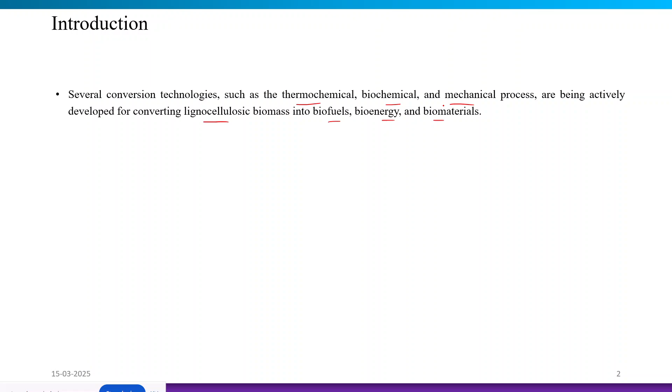So, in this lecture, we will mostly focus on pyrolysis. It is one of the important thermochemical technologies that produces bio oil as well as biochar, which can be further upgraded into a variety of value added products. We focus on pyrolysis because our lecture is about biochar and bio oil production, and we get simultaneous production of these two products from pyrolysis.

There are different kinds of pyrolysis processes according to the heating rate. Depending on the heating rate, the percentage yield of bio oil and biochar varies. We will mention other processes that also help us convert biomass into biochar or bio oil. Biomass pyrolysis has been recognized as a potential alternative technology to generate carbon negative or carbon neutral fuels, which will also help reduce the burden of fossil fuels on the environment.

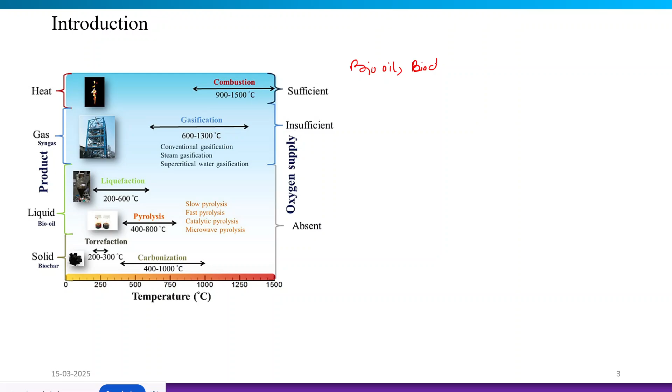So, in this picture, you can see the existing technologies, which give us heat along with various products, like bio oil, biochar, and also syngas, right? There is a temperature scale, and on the right hand vertical axis we can see the oxygen supply. It is also an important factor for the different process conditions.

Combustion is a thermal process operating around 900 to 1500 degrees Celsius in the presence of sufficient oxygen, right? When there is sufficient oxygen, we are mostly converting biomass energy directly to heat or thermal energy.

Gasification is a thermochemical process that operates with partial or insufficient oxygen. There are varieties like conventional gasification, steam gasification, and supercritical water gasification. The maximum product yield from gasification is syngas, with very limited production of biochar or bio oil.

So when we want to convert biomass into a gaseous product, we go for gasification. Depending on our desired product and the feedstock characteristics, we choose the process wisely. With liquefaction, we get mostly the liquid or bio oil product. Here you can see the variation in temperature of the process conditions.

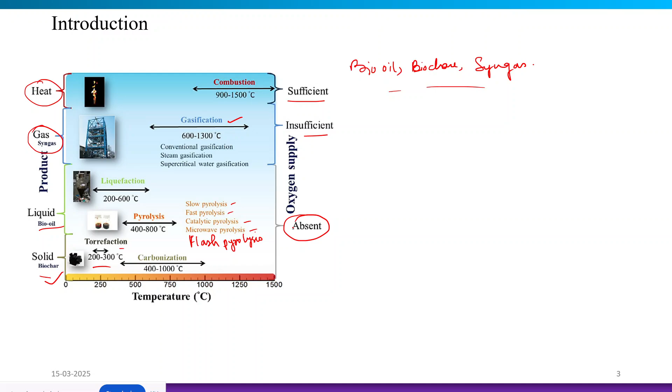So pyrolysis, torrefaction, and carbonization operate in the absence of oxygen. So you can see this biomass can be converted into different target products and other byproducts, which have been mentioned in this picture. We are talking about slow pyrolysis. The reaction ranges are quite flexible depending upon the process you are choosing. Like slow pyrolysis, it can be from 300 to 700 as well. Okay, so in slow pyrolysis, the target product is mainly biochar, but there are other byproducts also like bio oil and combustible gases.

Coming to fast pyrolysis, where there will be a faster heating rate, the reaction temperature is around 350 to 700, obviously in the absence of air in both of the cases. But in fast pyrolysis, we will get the target product of bio oil, and there will be byproducts, that is biochar and combustible gases. So you can easily recognize that when there is a faster heating rate, there will be more formation of the liquid product, or the bio oil.

Coming to gasification, the process condition is maintained in the insufficient or partial presence of air or oxygen. The reaction temperature is quite high, higher than pyrolysis, like 700 to 1200 degrees Celsius. And the target product is syngas. Here we mostly get these combustible gases, syngas, and byproducts like biochar and tar.

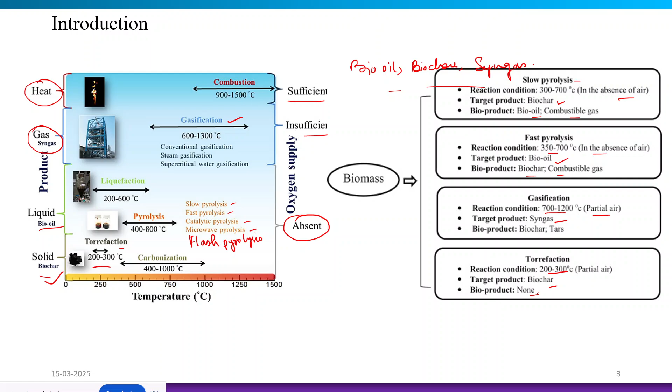So we were talking about biochar production. We already discussed the major processes we follow for biochar production, right? So biochar is produced by thermochemical conversion processes. We discussed a little bit about pyrolysis and torrefaction, and we will also discuss the hydrothermal carbonization process. So this carbonization process can be in the absence or in the presence of the hydrothermal condition. In these cases, we will get biochar and hydrochar respectively.

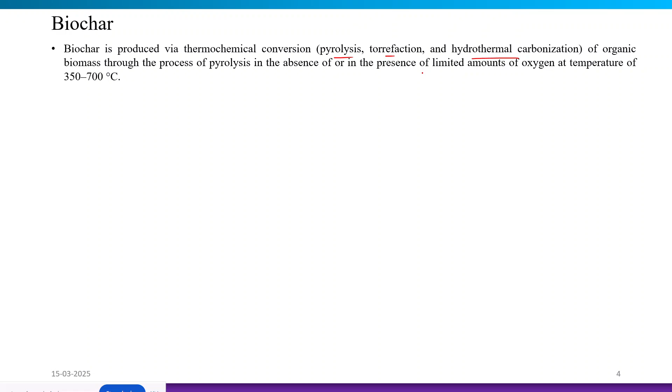So we convert the biomass through the process of pyrolysis in the absence of air in the range of 350 to 700 degrees Celsius. So we produce biochar as a carbon rich solid residue with carbon content ranging from 65 to 90 percent. And this biochar has surfaces with a high level of aromatic species, as well as oxygen functional groups on the surface of the biochar, and it also has a good porous structure.

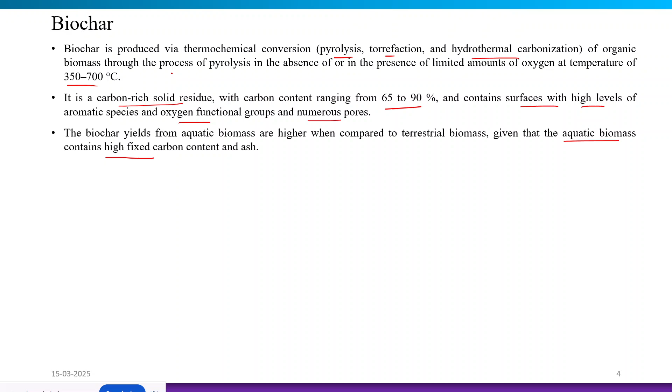Biochar yield from aquatic biomass, like algae or other kinds of aquatic biomass, is higher when compared to the yield we get from terrestrial biomasses, given that aquatic biomass contains higher fixed carbon content and also higher ash content. So as a result, we get the maximum biochar yield when we use aquatic biomass as our feedstock.

The elemental composition of the biochar changes with pyrolytic process parameters like pyrolytic temperature, and it also depends on the type of feedstock you are using. The carbon content tends to increase when we increase the pyrolysis temperature. While the carbon content increases, we get a decrease in other contents like nitrogen, sulfur, hydrogen and oxygen. These elements evolve as gaseous products when we increase the pyrolysis temperature.

Feedstock carbon is modified during this heating process to produce more aromatic rings in the biochar structure. These aromatic rings present in the biochar cannot be easily degraded by microorganisms. Thus, we make long-term carbon sequestration possible in the soil. Biochar produced from different biomass feedstocks will help with long-term carbon sequestration.

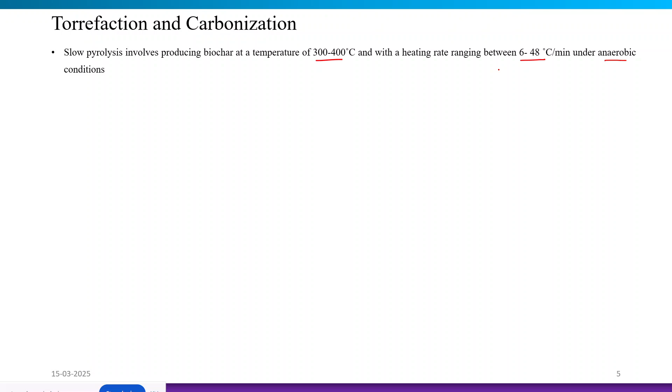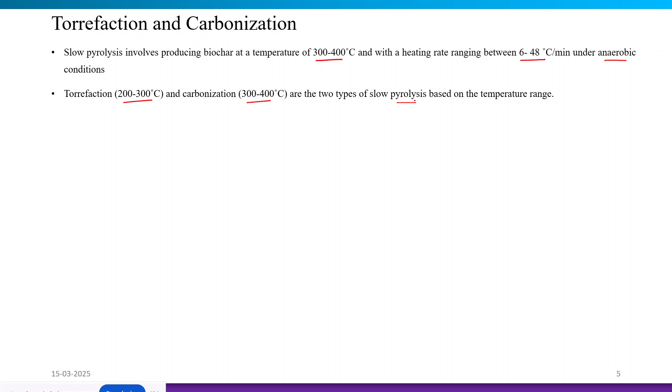We will now discuss slow pyrolysis processes, mainly torrefaction and carbonization, because they have a higher yield of biochar. Slow pyrolysis involves producing biochar in the range of 300 to approximately 400 degrees Celsius, with a heating rate of 6 to 48 degrees Celsius per minute under anaerobic conditions, in the absence of oxygen. Torrefaction's temperature range is 200 to 300 and carbonization is slightly higher, 300 to 400 degrees Celsius. These are categorized as slow pyrolysis processes depending on the temperature range.

Torrefaction and carbonization are thermal decomposition processes which produce a carbon-rich product like char with high energy density, brittle in nature, with higher hydrophobicity and reduced H/C and O/C ratios. These reduced ratios are required for a good biochar. In these processes, organic substances are heated in an inert atmosphere, usually at atmospheric pressure, which generates both condensable and non-condensable gases along with the char.

The solid product, or char, generally contains a carbon-concentrated residue and the mineral components of the raw material, while the gaseous product is composed of water, carbon dioxide, carbon monoxide and several organic compounds which form and are released during the process. So ultimately, we get a solid carbon residue as char.

The structural composition of the biomass determines the temperature region of torrefaction. It has been noticed that biomass with a high hemicellulose content is preferably subjected to light torrefaction, around 200 to 235 degrees Celsius. Strong torrefaction, in the range of 235 to 275, is mostly beneficial for biomass with higher cellulose and lignin content.

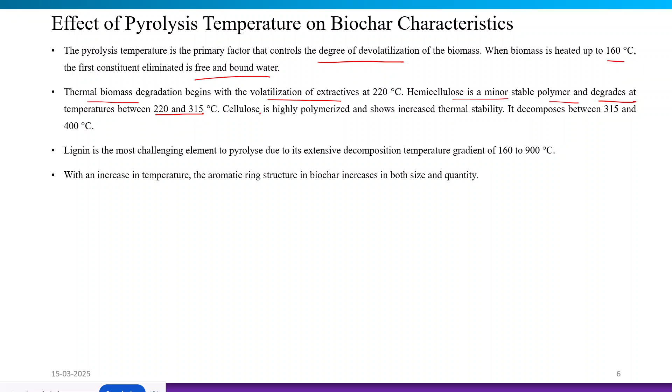Then when we slightly increase the pyrolysis temperature, there will be initiation of thermal biomass degradation with volatilization of extractives. Then hemicellulose gets degraded in the temperature range of 220 to 315 degrees Celsius. Then comes cellulose. Cellulose is highly polymerized and shows higher stability, so it gets decomposed in the range of 315 to 400 degrees Celsius.

And at the last is lignin, the most challenging element in the lignocellulosic biomass. It gets pyrolyzed due to an extensive decomposition temperature gradient in the overall range of 160 to 900 degrees Celsius. So we can see with the increase in temperature, the aromatic structure in the biochar increases in both size and quantity.

With the increase in pyrolysis temperature, the availability of the major structural components and other macromolecules of the biomass in the solid residue decreases. It also decreases the polarity of the biochar, so as we increase pyrolysis temperature, the biochar gets more hydrophobic in nature. The hydrophobicity increases with temperature to a certain extent, but if we increase the temperature beyond, suppose, 900 degrees Celsius, then the hydrophobicity will decrease again.

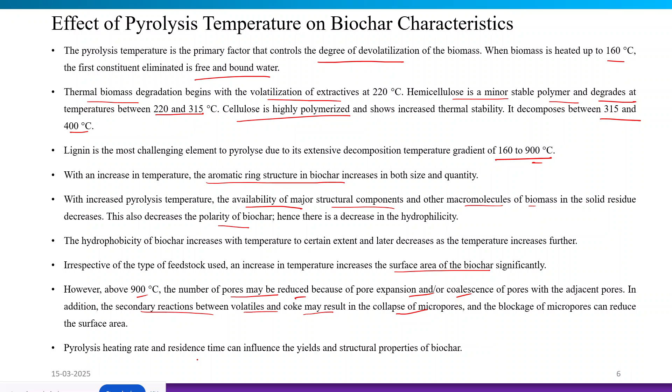Is there any question? Sorry, my net got disconnected for some time. Yeah. Is there any question till now?

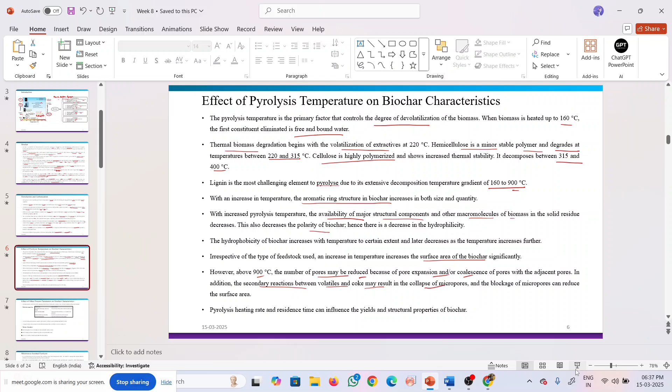Okay, so we were discussing the biochar characteristics which will be affected by the variation of the process parameters. We have discussed how the pyrolysis temperature variation will affect the biochar quality. So there will be effects of other process parameters on the biochar characteristics.

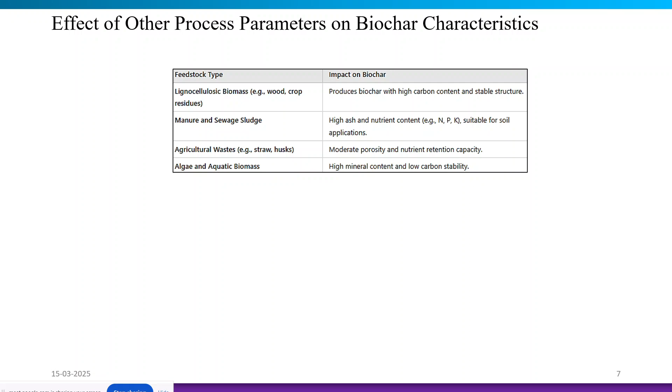So, biochar properties can be tailored by adjusting feedstock type, heating rate, residence time, activation methods, and gas environment. When we talk about feedstock composition, lignocellulosic biomass produces biochar with very high carbon content and a comparatively stable structure. When we take manure or sewage sludge kind of feedstock, we get high ash content and nutrient content, which is suitable for soil applications.

Agricultural waste like straw or husk produces moderate porosity and nutrients in good quantity in the produced biochar. Now, algae and aquatic biomass produce mineral content in the biochar but low carbon stability. So the most stable and highest carbon content biochar we can produce using lignocellulosic biomass.

So we already discussed that a slower heating rate will promote complete carbonization, which will lead to a more structured and stable nature of the biochar. A longer residence time will increase the biochar stability, but it may reduce the yield of the biochar due to excessive carbon loss.

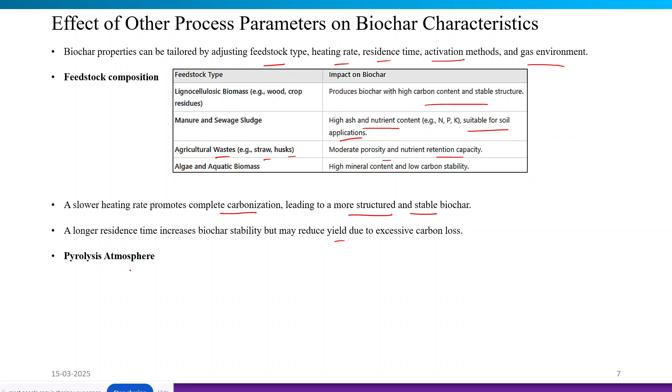This pyrolysis atmosphere also has an important role in the biochar characteristics. Now, when we use an inert atmospheric condition, the biochar produced will have stable carbon content. When we do it in the presence of steam or in a carbon dioxide atmosphere, it will enhance the biochar porosity and, as a result, it will also enhance the surface area of the biochar.

Oxygen and air, if present in the pyrolysis condition, which we generally don't consider, but if oxygen is still present, it leads to oxidation and reduces the biochar stability. So that's why when we do the pyrolysis reaction, we must ensure that there is no contact with oxygen during this thermal conversion.

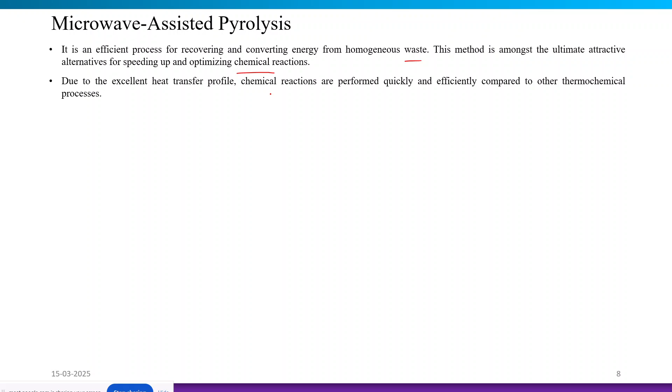So this method is amongst the ultimate attractive alternatives for speeding up and optimizing the chemical reactions. Due to the excellent heat transfer profile that we follow in microwave assisted pyrolysis, the chemical reactions are performed quickly and efficiently compared to the other thermochemical processes.

So microwave assisted pyrolysis provides several benefits compared to traditional pyrolysis, including uniform heating altogether. If your feedstock is homogeneous, there will be more chances of uniform heating, and a quick heating rate, volumetric and selective heating are provided in microwave assisted pyrolysis.

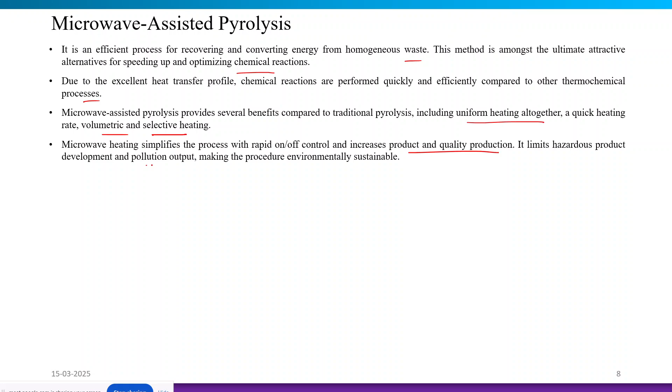So this microwave heating simplifies the process with rapid on-off control and increases product and quality production. It limits hazardous product development and pollution output. Also, it makes the procedure environmentally sustainable. An additional benefit of microwave assisted pyrolysis is rapid heating efficiency due to the in situ heating method that we follow in microwave assisted pyrolysis.

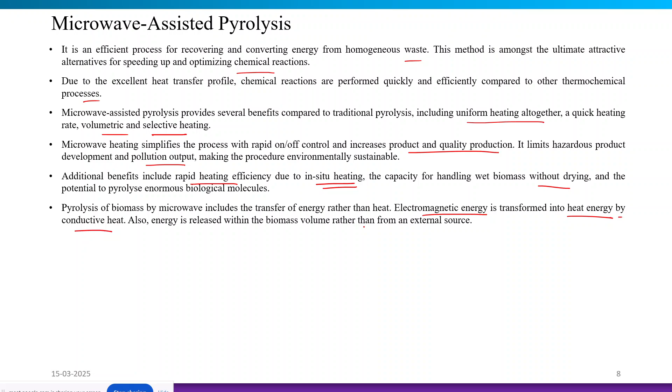So we can handle wet biomass without drying, and we also have the potential to pyrolyze enormous biological molecules without any issue in the microwave assisted pyrolysis process. What we do here is transfer energy rather than heating the biomass. They transfer electromagnetic energy, which is transformed into heat energy by conductive heat transfer. Also, the energy is released within the biomass volume in microwave assisted pyrolysis, rather than supplied from an external source.

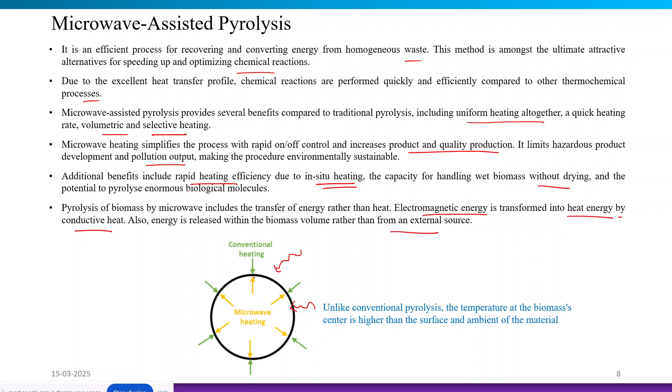So in this picture you can get an idea of how microwave heating is different from the conventional heating process. In the conventional heating process, suppose this is a biomass molecule, we are heating at the surface of the biomass molecule. But in the case of microwave heating, we are passing electromagnetic energy which will transfer the energy into the volume of the biomass. So the temperature of the biomass center gets higher than the temperature of the surface. Thus it goes from inner to outward.

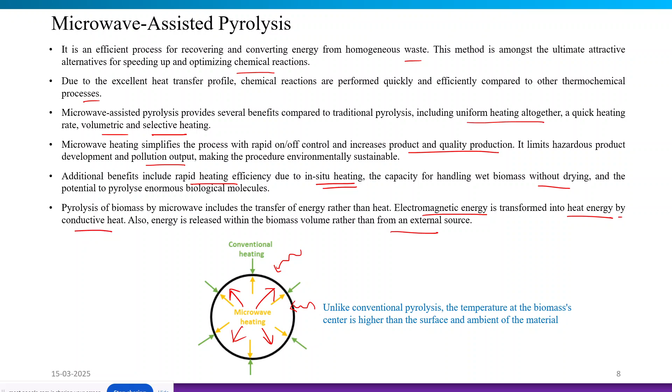This way it is different from conventional heating, and as we are doing it in a volumetric way, uniform heating is expected in the microwave heating process. The condition is that the feedstock should be homogeneous in nature so that it assists the uniform heating.

So microwave biochar has unique physical and chemical properties, and it is very stable compared to the conventional pyrolysis method. Compared to the previous heating process, the feed in this process is heated from the depth of the sample to the surface of the sample. That is, from the inner part of the sample it slowly goes to the surface. Thus, it allows the heating process to occur at a very rapid rate.

Microwave heating is a very quick and energy efficient heating process. It facilitates yield production and eliminates the need for liquid convection. It also facilitates good thermal control and restores the energy and chemical value of the waste products. So it has the best biochar production in terms of quality, and it is also an efficient method in terms of surface efficiency and cost effectiveness.

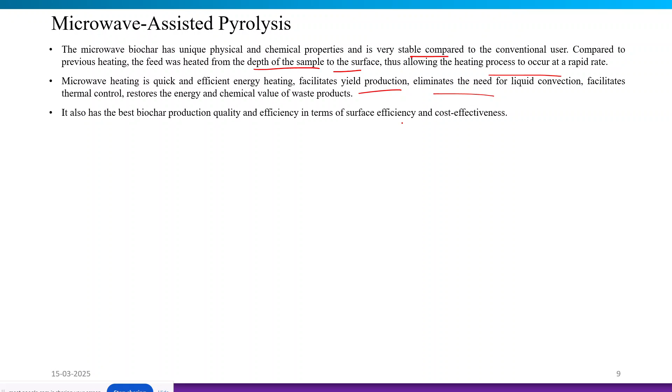So here the resulting biochar will have a higher surface area, approximately 450 to 800 square meters per gram, and it also contains many functional groups on the surface of the biochar when compared with conventionally produced biochar.

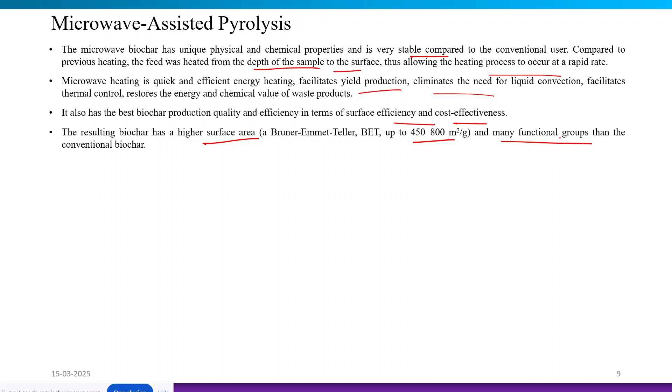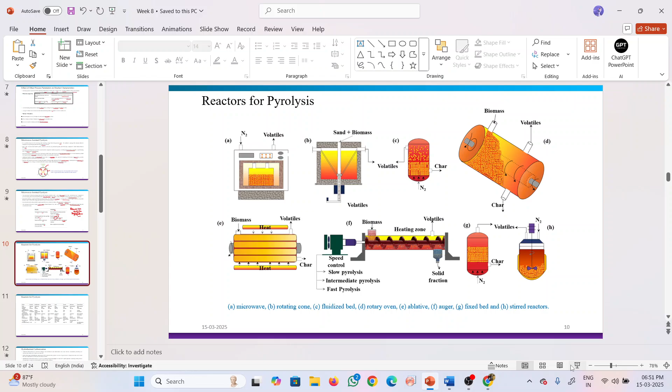So here you can see some visual schematics. You can get an idea of how the pyrolysis reactor acts or behaves. The first one is microwave pyrolysis. You have seen microwaves, right? Microwaves we use for cooking. On the same principle, the same kind of reactor we use for microwave pyrolysis reactions. So you can see the inert nitrogen gas is passed through and the volatiles are collected from the other outlet, and the microwave energy passes through the biomass placed inside the reactor, which helps to get a faster heating rate and converts the biomass to carbonaceous material or other volatiles.

The second one is the rotating cone. Here we use sand plus biomass in the reactor, and we collect the volatiles at the top of the reactor, and this is a rotating cone design. Next, the fluidized bed, which is widely used for pyrolysis reactions. Nitrogen is passed through from the bottom of the reactor. The biomass molecules are fluidized, and under the temperature conditions they are converted into char product as well as volatiles, which are collected from the top of the fluidized bed reactor.

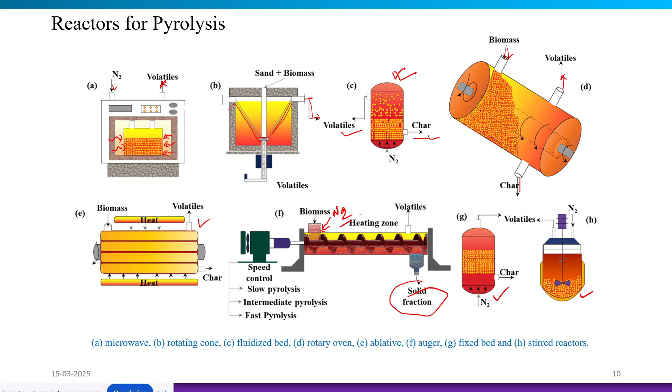This last one is the fixed bed. It is also widely used, and the stirred tank reactor. All of these reactors that we discussed, we generally use for the pyrolysis purpose.

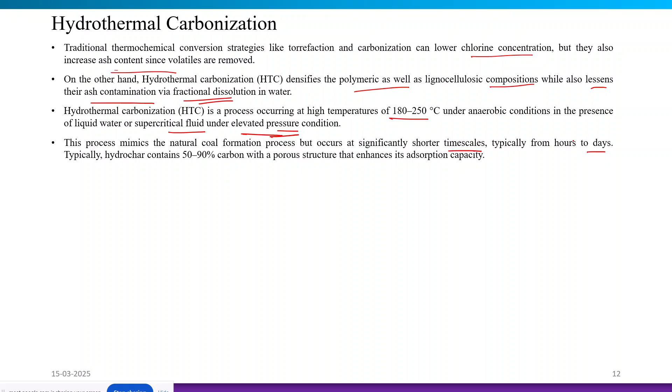So here, to differentiate, we term the char produced here as hydrochar. This hydrochar contains 50 to 90% of carbon with a good porous structure that will enhance the adsorption capacity of the hydrochar. So this process is characterized by a deep degree of impact on the feedstock, resulting in a higher quantity of the carbon product as well as higher quality. So this is known as, we can also refer to it as, biocoal or hydrochar.

So longer hydrothermal treatments contribute not only an increase in the calorific value of the hydrochar, but also produce material with a more complex structure associated with the polymerization of the intermediates that are formed. They get polymerized and ultimately form a good quality of hydrochar. But sometimes when we get a good quality of hydrochar, the yield of the hydrochar gets reduced.

An increase in the reaction time contributes to the formation of certain porosity of the structure. So we get an increase in the pore volume and a higher surface area when we increase the reaction time. So during the hydrothermal carbonization process, biomass undergoes a series of complex chemical reactions including dehydration, decarboxylation, polymerization. Hydrochar is rich in oxygen-containing functional groups, thus it promotes the higher reactivity of the hydrochar.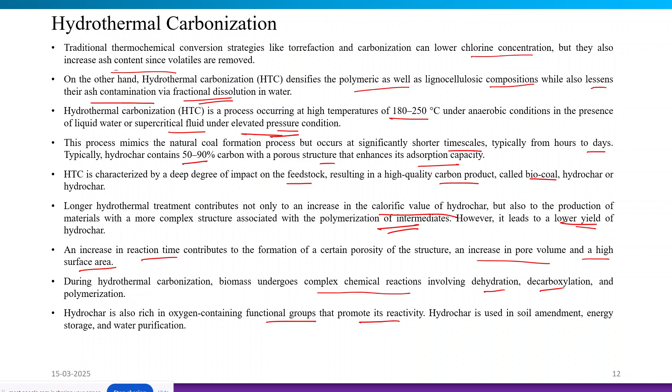Hydrochar can also be used like biochar in the soil treatment process, energy storage like manufacturing of electrodes, and the water purification process as a good adsorbent. The advantage of hydrothermal carbonization is that without any energy-intensive drying method, we can transform any kind of biomass with any quantity of initial moisture content. We can form the carbonaceous solid by this method, hydrothermal carbonization.

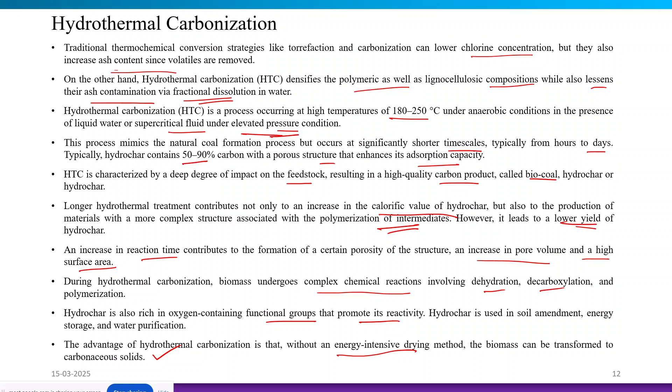So we are not following any kind of restrictions for the initial moisture content of the biomass, because we are not requiring any kind of dried biomass. We can directly go with the wet biomass and we can produce the carbonaceous material in the presence of elevated pressure and temperature conditions. So these are the four steps that we follow in the hydrothermal carbonization process. We can operate with biomass with 75 to 90% initial moisture content. We can easily process this biomass in this hydrothermal carbonization process.

So first we go for hydrolysis, where biomass components such as cellulose, hemicellulose, and lignin are hydrolyzed into smaller molecules in the presence of high pressure water, leading to the formation of some sugars, organic acids and other soluble compounds. The next step is dehydration, where water molecules are removed from the biomass matrix, resulting in the formation of intermediates such as furfurals, aldehydes and ketones.

Next, it follows the decarboxylation process and polymerization, where the carboxylic groups present in the biomass components are eliminated and they lead to the release of carbon dioxide, and they also form aromatic compounds in this stage. The last stage is carbonization, where continuous heating and high pressure conditions cause the carbonaceous intermediates to undergo the carbonization process, which results in the production of the solid hydrochar.

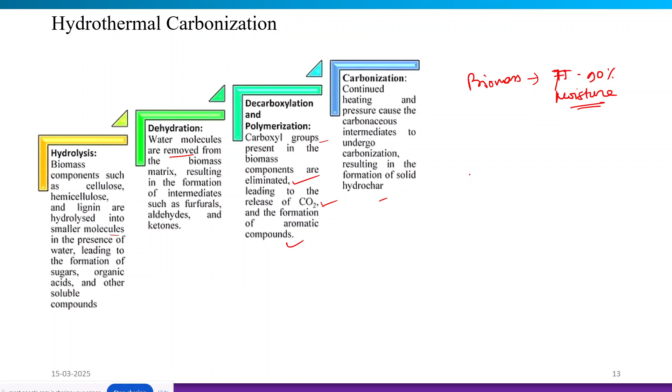So in this process, regarding the high pressure condition, this autogenous pressure is automatically generated in the system. Residence time is 0.5 to 8 hours. In a very short time we get the carbonaceous material. So the carbon content is increased during this last stage of the carbonization phase. The content of oxygen and mineral matter decreases, with a minor gaseous product. So these are the four major stages followed in hydrothermal carbonization.

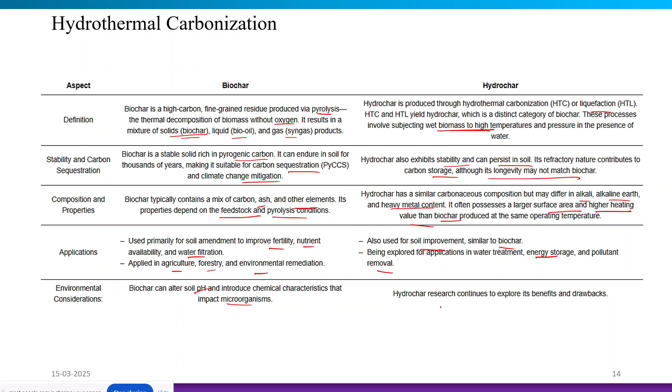Next, we are going to discuss the gasification process, because in gasification we get char as a byproduct, not as a main product. But still we are going to discuss it because this process has a byproduct yield of biochar. Gasification converts carbonaceous material with a gasification agent, like air gasification or steam gasification, or in the presence of oxygen at high temperature and pressure, into biochar and oxygen deficient states.

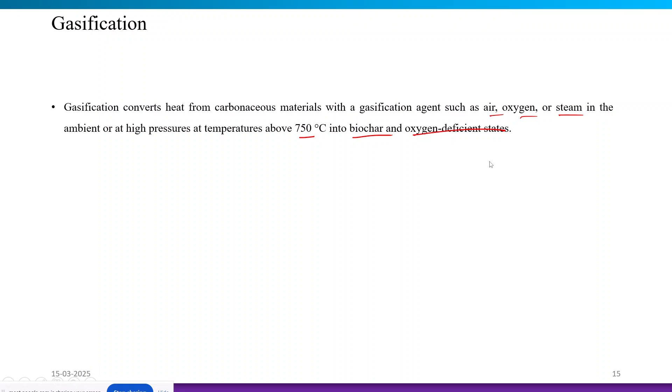Gasification takes place at a high temperature, so we get more cracking of the carbonaceous material and more gaseous yield. When air is used as an oxidizing medium, the resulting gas contains 85% syngas, which includes hydrogen, carbon monoxide, carbon dioxide, some methane, and other lower molecular weight hydrocarbons. Steam gasification yields more hydrogen, which has a higher heating value.

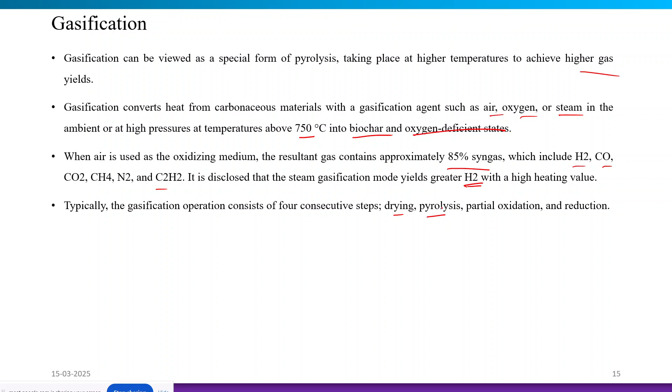Typically, gasification consists of four consecutive steps: drying, pyrolysis, partial oxidation, and then reduction at a higher temperature region. Biochar yields are insufficient under gasification conditions because we get gaseous products at maximum yield. That is the primary limitation of this process: biochar is produced as a byproduct, not the main product. And there are a lot of chances of greenhouse gas emission.

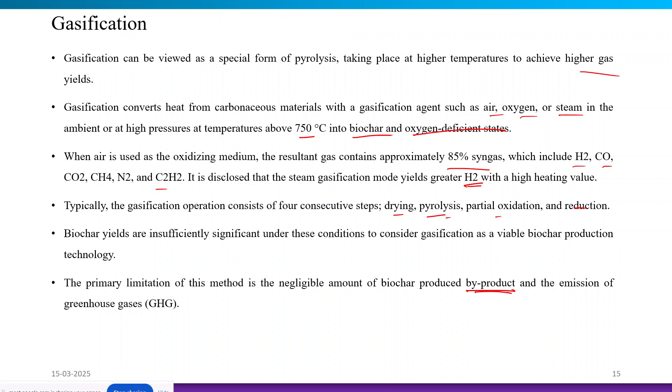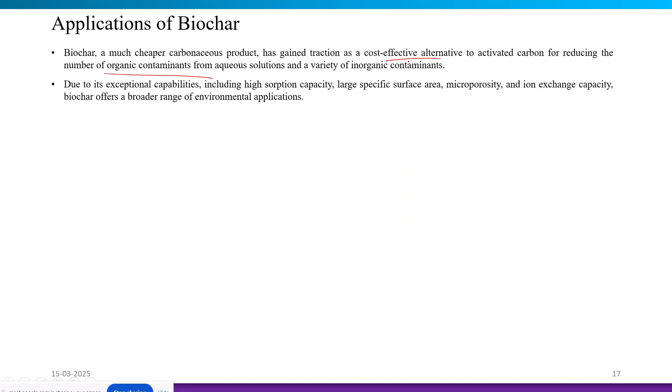So we will now discuss the applications of biochar in different environmental conditions. We are producing biochar from biomass, so it is obviously a cheaper carbonaceous product. It has gained a lot of interest as a cost-effective alternative to activated carbon for reducing a number of organic contaminants from aqueous solutions and a variety of inorganic contaminants. Due to exceptional capabilities like high adsorption capacity, large specific surface area, microporosity, and ion exchange capacity, biochar offers a wide range of environmental applications.

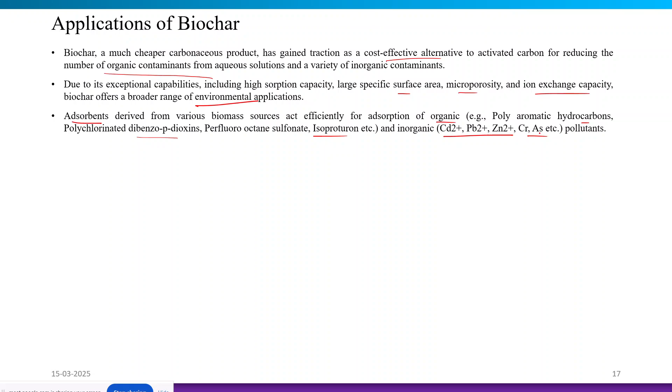Coming to biochar as an adsorbent, it efficiently acts for adsorption of organics like polyaromatic hydrocarbons, polychlorinated dibenzo-p-dioxins, or isoproturon. So these kinds of organic chemicals it can adsorb or separate, and also inorganic metal ions it can adsorb, reducing the pollutants in the environment.

Biochar, which is a porous solid with a large surface area, is also a good material for wastewater treatment. It has shown to be an excellent medium for absorbing nutrients from the effluent, and it can also be used as a soil modification source. While the large surface area of activated carbon favors toxin absorption via pore filling, many components, particularly surface functional groups, facilitate biochar's removal performance.

Biochar's distinctive chemical structure, such as higher surface area and a specific quantity of surface functional groups, is simply generated via activation and functionalization, which is a very prominent, promising application as a flexible catalyst and catalytic support in various chemical reactions. By oxidation, biochar may be simply separated from the catalyst to extract the precious metals that are adsorbed. Thus, utilizing biochar as a catalyst will increase its use and cyclic capacity.

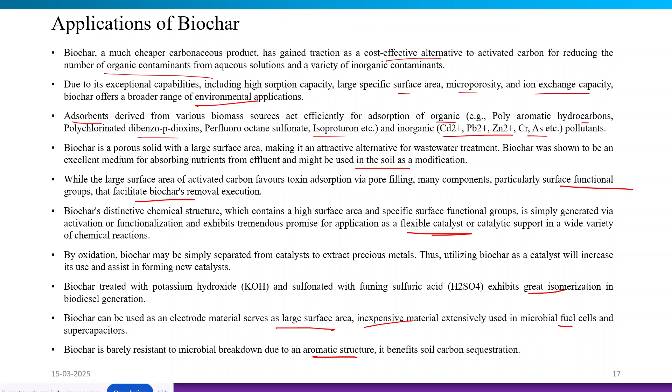Application-wise, as a catalyst it is low cost and a more significant proportion of functional groups are present. For energy storage, it produces electrode material with relatively poorer performance than other electrodes we use, but still we can use it as an alternative. As a soil amendment, it increases fertility and improves the quality of the soil, and increases carbon sequestration. The benefits are that it is a low cost material and reduces greenhouse emissions. Also, it regulates nutrient loss. But if heavy metals and polyaromatic hydrocarbons are present inside the biochar, it may contaminate the soil.

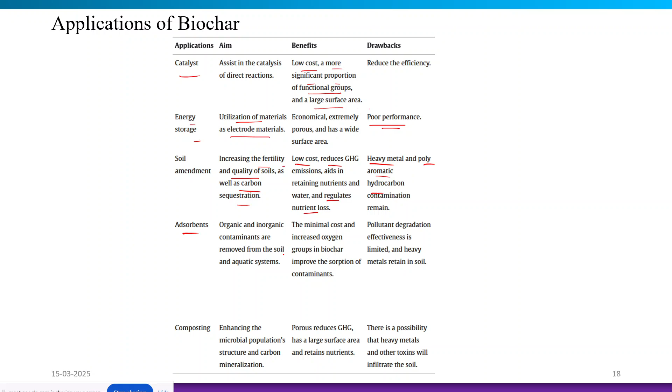In terms of the adsorbent, organic and inorganic contaminants can be removed very efficiently by different kinds of biochar adsorbents from soil as well as aquatic systems. It offers lower cost, and increased oxygen groups in the biochar improve the adsorption capacity for different contaminants. But sometimes pollutant degradation effectiveness is limited, and heavy metals may be retained in the soil for a longer time, which may create contamination. Also, if we compost the biochar, that will enhance the microbial population structure, which will ultimately enhance carbon mineralization. Thus it reduces greenhouse gas emissions and also increases the nutrient value of the soil.

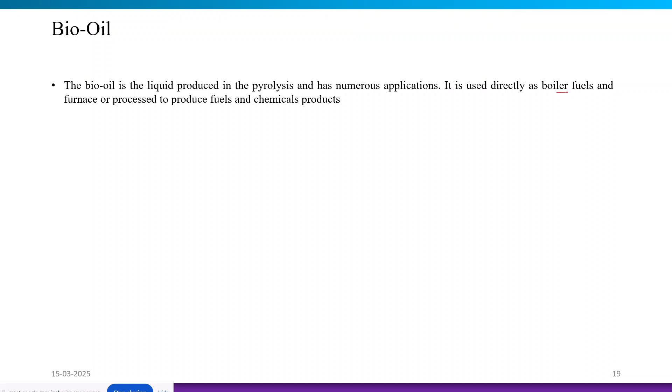We discussed the characteristics of bio oil in detail in the last class. So we will now mostly touch on the applications and advanced processes of bio oil production, not in detail. Bio oil, which is the liquid produced in the process of pyrolysis, also has numerous applications. It can be directly used as boiler fuel, but it has certain limitations we need to take care of. It can also be used as a raw material to produce different chemical products.

Bio oil production mainly follows the fast pyrolysis process, which favors bio oil yield as a primary product under moderate temperature conditions, shorter vapor residence time, and higher heating rate. Bio oil is composed of a complex mixture of organic substances like aromatic hydrocarbons, phenols, ketones, esters, ethers, sugars, amines, alcohols, furans, and water, obtained by chemical reactions and biomass moisture.

This bio oil is highly oxygenated in nature, and the higher oxygen content sometimes creates a lot of issues for utilizing bio oil directly in boiler conditions. Because it is highly oxygenated, it is also chemically unstable. So we need to go for upgrading of the bio oil so that we can reduce the oxygen content and remove other wastes.

Bio oil has some undesirable features like high acidity, low thermal stability, low heating value, and high viscosity when compared to conventional diesel. So we need to go for some upgradation method to improve these shortcomings in bio oil.

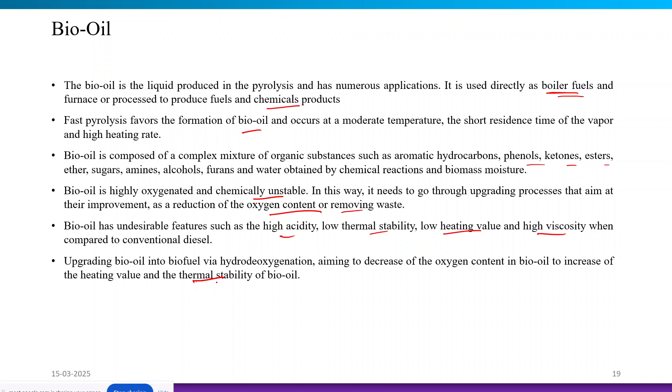We upgrade the bio oil into biofuels via hydrodeoxygenation, which aims to decrease the oxygen content of the bio oil to increase the heating value as well as to improve the thermal stability of the bio oil. We will now discuss some of the important operating parameters that affect the biomass pyrolysis process with the target of bio oil yield.

First one is temperature. Each biomass has potential to provide maximum bio oil yield at a specific pyrolysis temperature. The conversion efficiency will increase with the increase in temperature due to the extra energy available to break down the biomass molecular bonding, and there are studies that reported higher liquid yield in the range of 450 to 550 degrees Celsius.

But at a higher temperature there is secondary cracking of the volatiles, which results in a higher gas yield. So if secondary cracking is happening, we will have more gaseous yield and we will not get a higher yield of bio oil. So we need to minimize the secondary reactions.

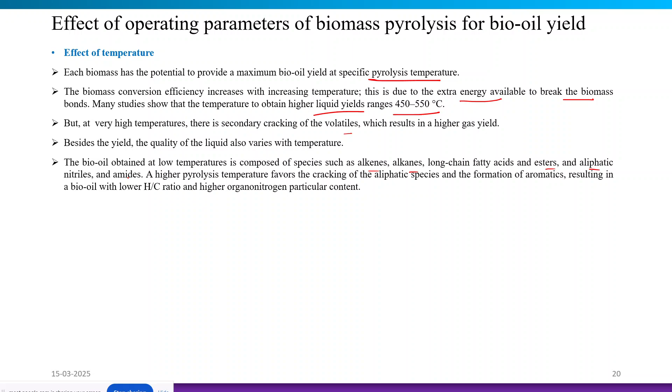Beside the yield, the quality of the liquid also varies with the temperature. Bio-oil obtained at a low temperature is composed of alkenes, long fatty acids, esters and aliphatic nitriles or amides. A higher pyrolysis temperature will favor the cracking of these aliphatic species and they form more aromatics, resulting in a lower H/C ratio of the bio-oil and higher organonitrogen content.

Now, the effect of the heating rate. The heating rate of the pyrolysis process is another crucial factor for biomass decomposition. We already discussed that in fast pyrolysis, the higher heating rate causes maximum bio oil yield. The pyrolytic behavior resulting from heating rate variation can also be associated with the feedstock composition. In case of triglyceride material, a higher heating rate can induce cracking of the condensable vapors.

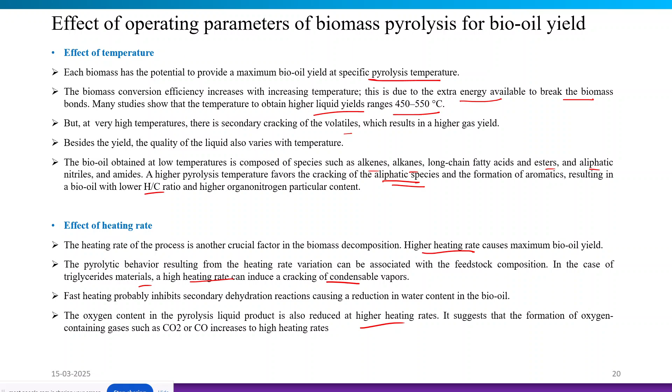Faster heating probably inhibits the secondary dehydration reaction, causing a reduction of the water content in the bio oil. That's why fast pyrolysis is mostly preferable for the production of bio oil. The oxygen content in the pyrolysis liquid product is also possibly reduced with a higher heating rate. It is suggested that the formation of oxygen containing gases such as carbon dioxide and carbon monoxide also increases due to the higher heating rates.

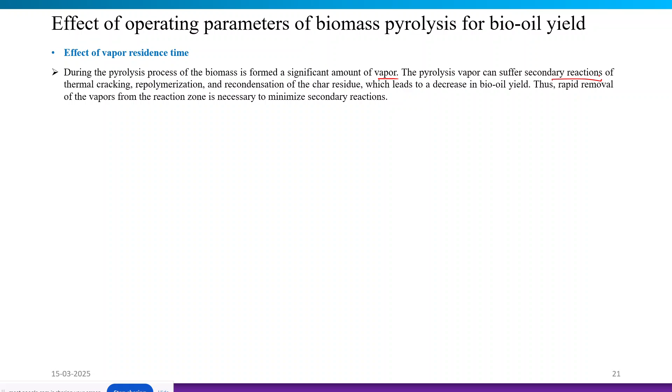Next one is the effect of the vapor residence time. During the pyrolysis process of the biomass, a significant amount of vapor is formed. This pyrolysis vapor can suffer secondary reactions through thermal cracking, repolymerization or recondensation of the charred residue, which leads to a decrease in bio-oil yield. So we need to minimize the secondary reactions through rapid removal of the vapor from the reaction zone.

Several studies analyzed that increasing the flow of the inert nitrogen gas inside the reactor causes an improvement in the bio-oil yield. However, if we increase the flow rate of the inert gas too much, the liquid yield will reduce, because the condensation of the vapor will not be completed, which ultimately increases the gaseous yield in the process. Higher temperature and a longer residence time are suitable for oxygen free bio oil production.

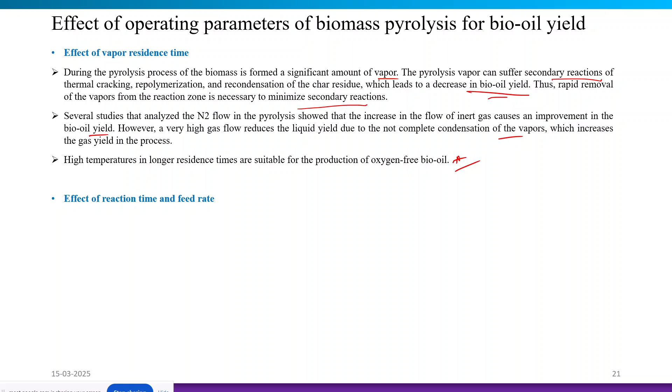Now coming to the effect of the reaction time and feed rate of the biomass. A longer reaction time can cause secondary reactions of the pyrolysis vapor, which can cause lower bio oil production. So we need to optimize the reaction time. With the feed rate, the product distribution and the bio oil characteristics are entirely dependent on the reactor configuration. Under a higher feeding rate, the vapor residence time will be shorter, meaning that secondary cracking or secondary reactions will not be favorable.

So we will get a more quantity of the bio oil and less quantity of the char or gaseous product. But very high feeding rate of the biomass also may cause decrease in the bio oil production, because we are not allowing the required residence time for the overall conversion. So bio oil yield will be reduced. So we need to go for optimization of the process to overall increase the bio oil yield.

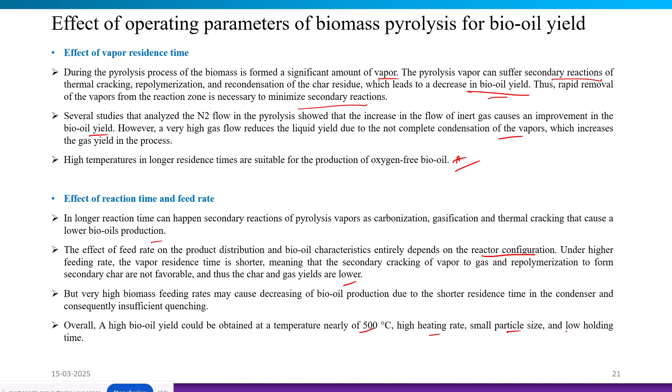So we can say that through the research we have found out that a high bio oil yield could be obtained in the temperature range of 500 with a higher heating rate, a smaller particle size, and low holding time.

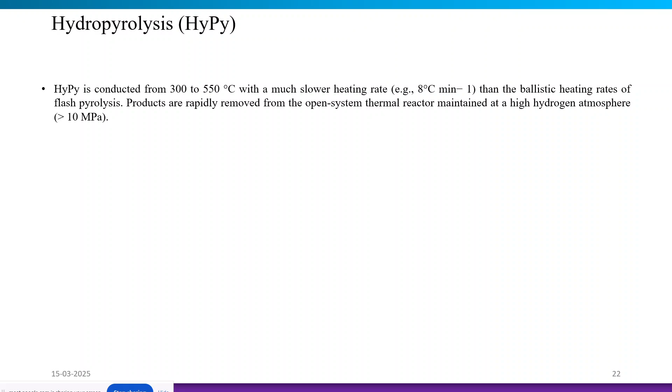So next, we are going to discuss about the hydropyrolysis process. This process is also an advanced process for the production of the bio oil. Specifically, this hydropyrolysis is conducted in the range of 300 to 550 degrees Celsius with a slower heating rate than the ballistic heating rates of flash pyrolysis. the products are rapidly removed from the system when a high hydrogen atmosphere is maintained inside the reactor.

So catalysts are very important for this hydropyrolysis. Different catalysts like zeolite and different other catalysts are used in the process for breaking down the complex organic molecules, while it minimizes the char formation and maximizes the bio-oil yield. So, one shortcoming of the conventional pyrolysis is that bio-oil produced is rich in oxygen content that we were discussing in last slides. But in case of the hydropyrolysis, it produces the bio-oil with reduced oxygen.

It can also increase the volatile yield and the proportion of the lower molar mass hydrocarbons in the pyrolysis product. So its higher volatile yield is attributed to the hydrogenation of the free radical fragments sufficient to stabilize them before they repolymerize and form the char. So the bio oil produced by the hydropyrolysis process has greater characteristics, like lower acidity, lower viscosity, higher hydrogen by carbon ratio, making it more stable and easier to refine into transportation fuel.

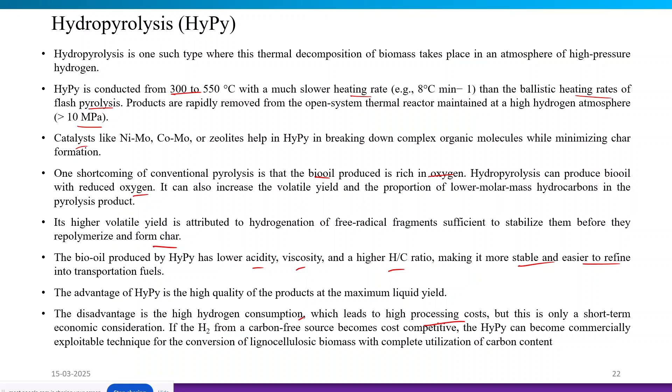The advantage of the hydropyrolysis is that it is producing high quality product at a maximum liquid yield. But it is having also some disadvantage, like high hydrogen consumption is occurring in the process. So the high processing cost is involved, and this is only a short term economic consideration. If the hydrogen from the carbon free source becomes cost competitive, the hydropyrolysis can become commercially exploitable technology for the conversion of the lignocellulosic biomass with complete utilization of its carbon content.

Now at the last we are going to discuss about the applications of the bio oil. So bio oil, we know that it has several types of applications. It can also be used as boiler fuel in comparison to the heavy fossil fuel. The combination of the bio oil features with the low emissions of the carbon dioxide, SOx, NOx. So they will reduce the air pollution, mitigate the problem that is related to the SOx, NOx emission from the boiler.

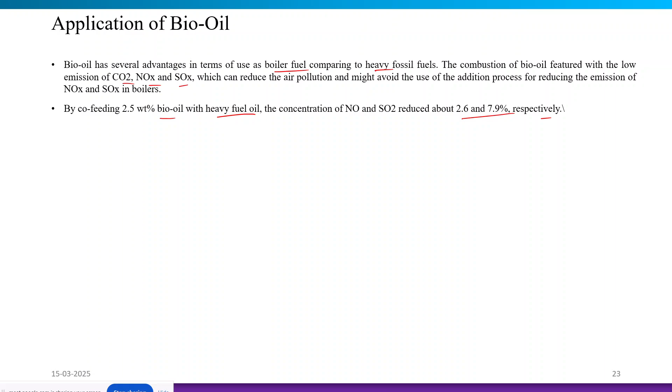So there has been a study that confirmed that co-feeding 2.5 wt% of the bio oil with the fossil heavy fuel, the concentration of the SOx and NOx may be reduced by this percentage respectively. So there is certain percentage of the co-feeding of the bio oil with the already existing heavy fuel oil. So we can have reduced emission of the SOx, NOx.

Direct burning of the bio oil, aiming for the heat production, could be competitive with the fossil fuel resources supply economically. While using the bio oil as a boiler fuel, proper pumping of the bio oil, ratio of the air flow rate to the bio oil flow rate, nozzle design, they could change the efficiency of the boiler significantly. However, due to distinct properties of the bio oil that we discussed, like higher acidity and higher oxygen content, and those kind of shortcomings, the configurations of the burner should be redesigned when we use the bio oil as a fuel.

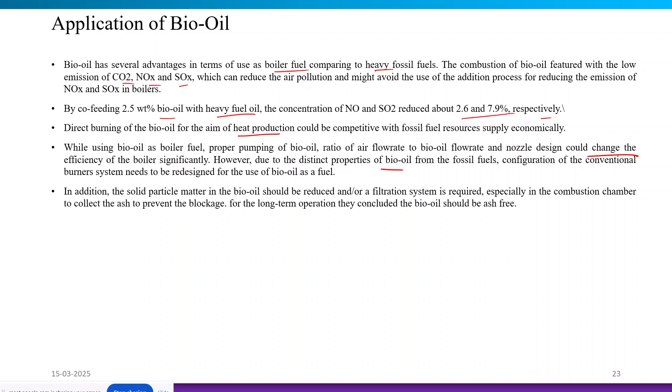In addition to that, the solid particle matter present in the bio oil should be reduced or should be treated through the filtration process, especially in the combustion chamber, to collect the ash to prevent the blockage. For longer term operation, researchers have concluded that the bio oil should be ash free. In addition to that, compared to the direct combustion of the bio oil, we can also go for the co-firing. Co-firing with fossil fuels could enhance the efficiency of the engine, and reduce the cost of the burner system and engine body modification.

With low co-feeding amount, like less than 5%, the bio oil could be co-fired with different fossil fuels without noticeable harm to the existing furnaces. The bio-oil contains high amount of the acid, water, and heavy oligomer compounds which make it unstable, and it contains lower energy content. As a result, the storage, transport, and direct use of the bio-oil in the engine of the vehicle is very difficult.

We overcome this by the help of the hydrodeoxygenation process, which can be employed as a methodology to improve the properties of the bio oil as engine fuel. This is a catalytic process, generally conducted under high pressure and high reaction temperature conditions, to reduce the oxygen content in the bio oil.

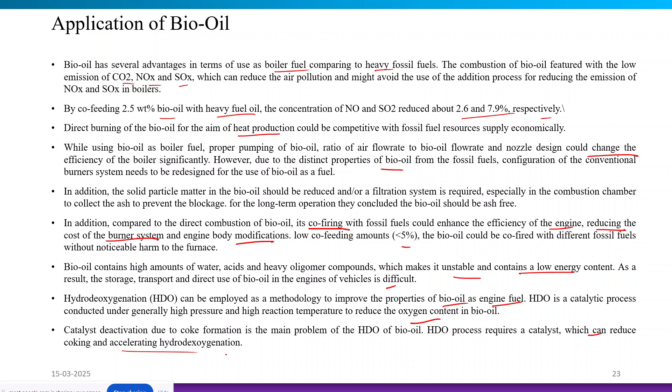Now, catalytic deactivation is also a great issue when we are using the bio oil as it is, because of coke formation, which is a main problem of the hydrodeoxygenation process of the bio oil. So this process requires a good catalyst which can reduce the coking and also accelerate the hydrodeoxygenation process.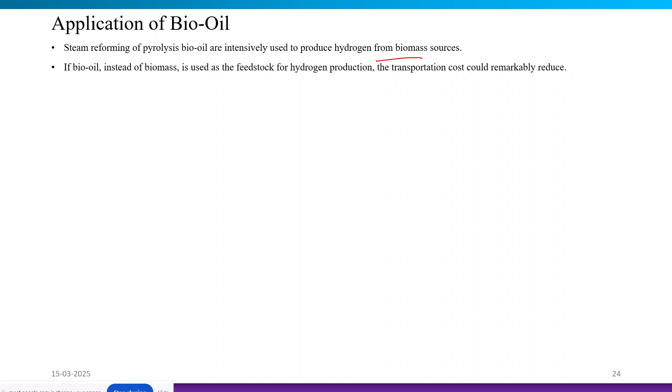Steam reforming of the pyrolysis bio-oil is intensively used to produce hydrogen from biomass resources. If the bio-oil instead of the biomass is used as a feedstock for hydrogen production directly, the transportation cost could be remarkably reduced. Raw biomass has a lot of volume, but if we convert it into bio oil and then go for hydrogen production through steam reforming of the bio oil, the overall transportation cost will be reduced.

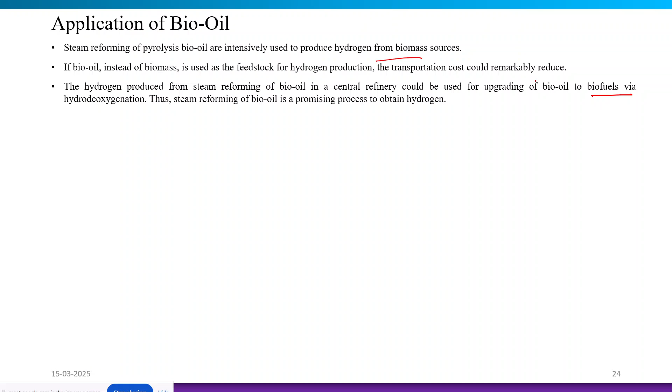The hydrogen produced from steam reforming of the bio oil in a central refinery could easily be used for upgrading the bio oil to biofuels by the hydrodeoxygenation method. Thus, steam reforming of the bio oil is a promising process to obtain hydrogen. Due to quick formation of coke, reactor design plays a vital role in eliminating the coke formation issue, so mostly fixed bed and fluidized bed reactors are used in the steam reforming of the bio oil.

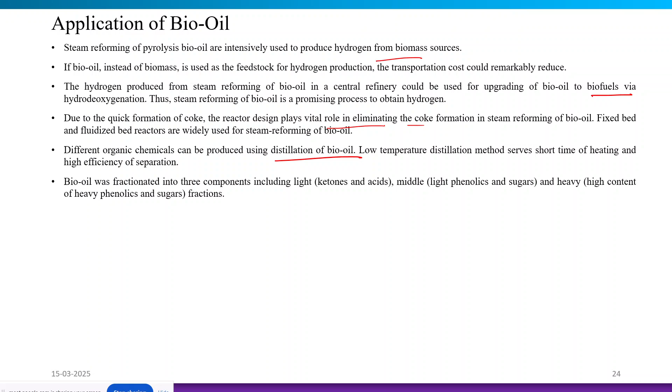Different organic chemicals can also be produced using distillation of the bio oil. Generally, we follow the low temperature distillation method, which offers short heating time and high efficiency of separating the bio oil into different products. Bio oil can be fractionated into three components: light components like ketones and acids; middle components, where we get light phenolics and sugar; and heavy components, where we get a high content of heavy phenolic and sugar fractions.

We also follow the liquid-liquid extraction method, where different solvents like alkaline solutions, ketones, ether, supercritical carbon dioxide, hexane and toluene are used to extract certain chemicals from the bio-oil mixture.

This bio-oil can be polymerized to produce high-strength carbon, followed by densified carbon material by carbonization reaction. This controlled solidification reaction and consequently the final product properties could be challenging due to the complexity of the bio-oil composition. Now, when we do the distillation, at the bottom of the distillation column we will get the tar also.

The tar produced during the pyrolysis reaction can also be utilized to fabricate activated carbon and other insulation material. We follow vacuum distillation to obtain bio-pitch from the tar, and then the bio-pitch is converted to carbon fiber by melting and extruding processes. Subsequently, carbonization of the carbon fiber is performed to ultimately produce activated carbon.

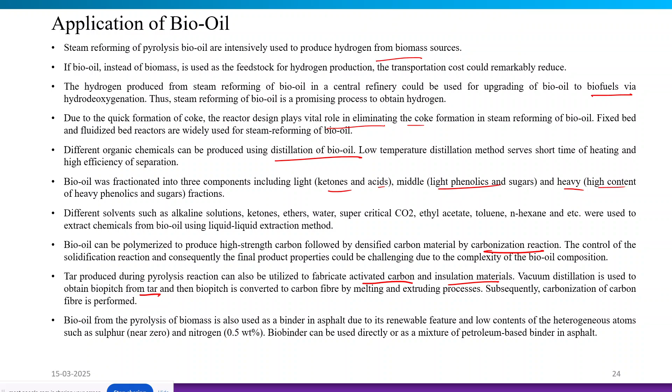Bio-oil from the pyrolysis of biomass is also used as a binder in asphalt due to its renewable feature and low content of heteroatoms, such as low sulfur and nitrogen. This biobinder can be directly used or used as a mixture with petroleum-based binder in the asphalt. We also get wood vinegar, polyurethane foam, pesticides, and plastics. A wide range of products can be derived from the bio oil.

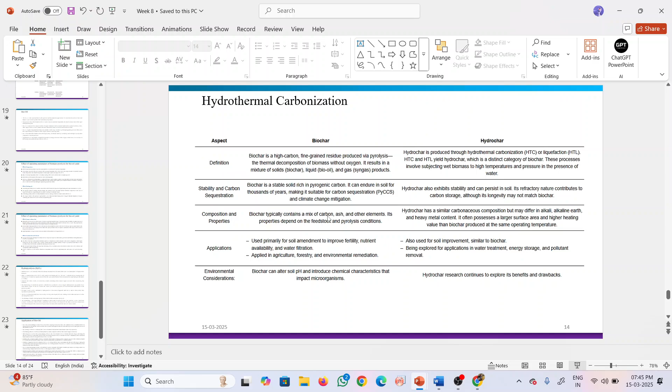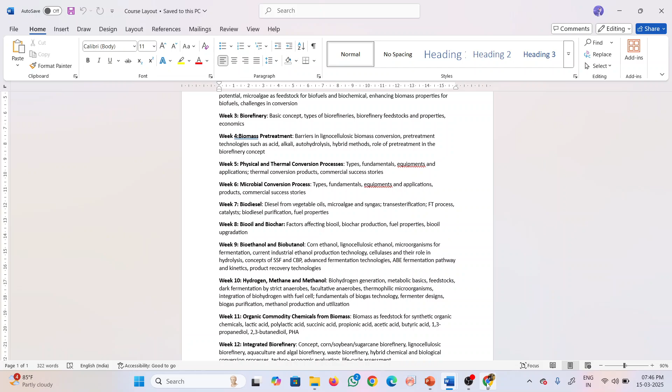So in today's class we have discussed a lot about bio oil and biochar. If there is any question regarding today's class, you can ask. In the next class, we will discuss bioethanol and biobutanol production. So we will meet in the next class to discuss that particular product from the process. I tried my best to cover all of the important points for biochar and bio oil.